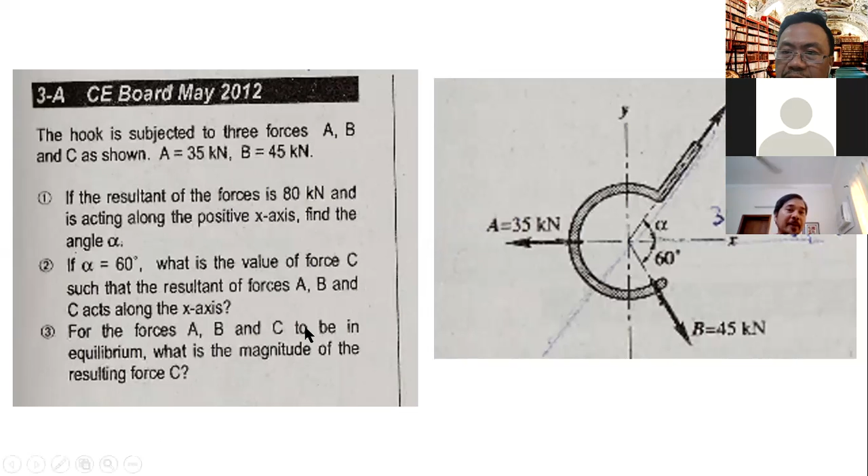Okay, so we have here the hook. This hook is subjected to 3 forces. You have A, this A, then you have C, and then you have B.

Okay, so which has corresponding forces. If the resultant of the forces is 80 kilonewton and is acting along the positive x-axis, find the angle. So there is a big difference that you have to check here. This is saying there's a resultant force of 80 kilonewton. This is number 1 and number 3, okay?

For number 3, the forces A, B, C have to be in equilibrium. It should be in equilibrium, so you are going to compute the force value of C. So it doesn't have a given resultant.

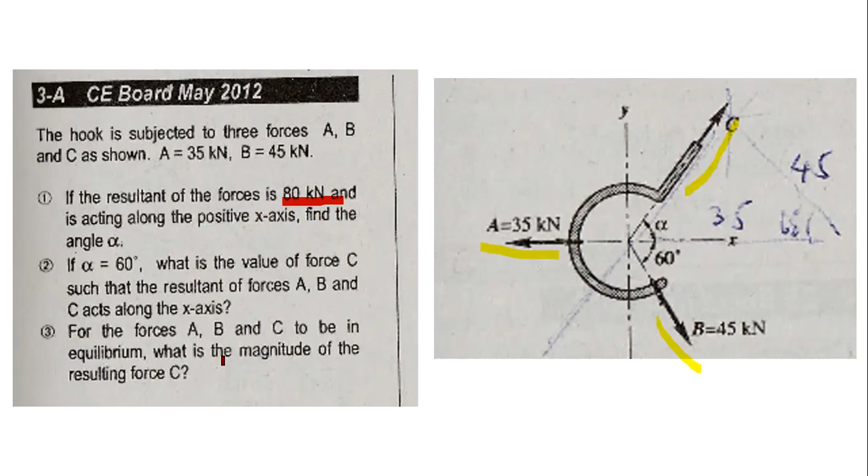Now first question, there is a resultant force of 80 kilonewton going to the right, positive x-axis. So there's 80 going to the right which we add for the first question. For the third question, only these 3 forces are in equilibrium, and you have to compute for force C. So for the first question, there is a horizontal resultant force of 80 kilonewton.

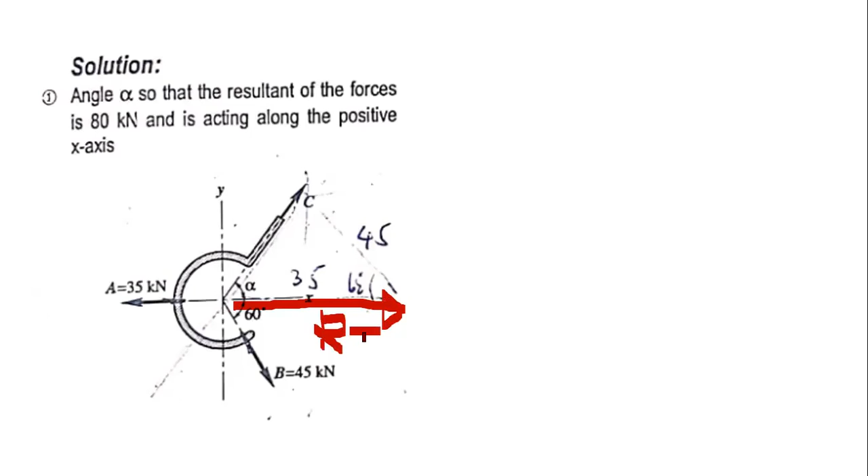Okay, that's what it's saying. So you just add these. And then we sum up forces horizontal.

So you have here C, this alpha, the cosine of alpha here becomes the C x-component. Cosine of alpha times C gives the x component. And then you have this 45 kilonewton, the x component is the cosine of 60. And then you have here in a direction going to the left, which is negative.

Equal to 80 kilonewton. This is the resultant force of 80 kilonewton. It happens here that the resultant force is just one, going to the right. That means the horizontal component is going to the right, the resultant force is going to the right. In other words, the horizontal component is also 80 kilonewton and the vertical component is 0.

That means C and B will just equate to 0 when you sum up the vertical direction. So sum up forces vertical direction, this is what we'll see too. We only have C and B.

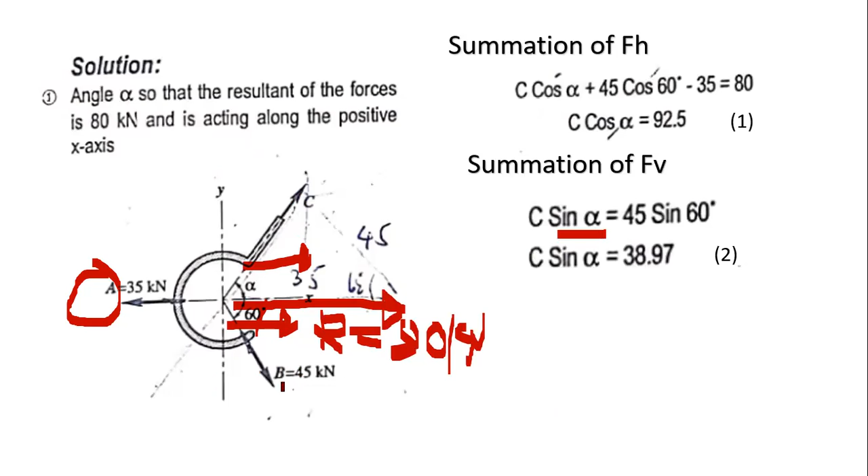For C, that component is sine of alpha. Whereas for B, it's the sine of 60. So we can have this one as equation 1 and this one as equation 2. And looking at the equations, if we divide equation 1 by equation 2, we can get tangent.

Okay, because actually it's cotangent - equation 2 divided by equation 1. Because C sine alpha divided by equation 1, which is C cosine alpha - the C's cancel out, so the remaining sine over cosine becomes tangent alpha.

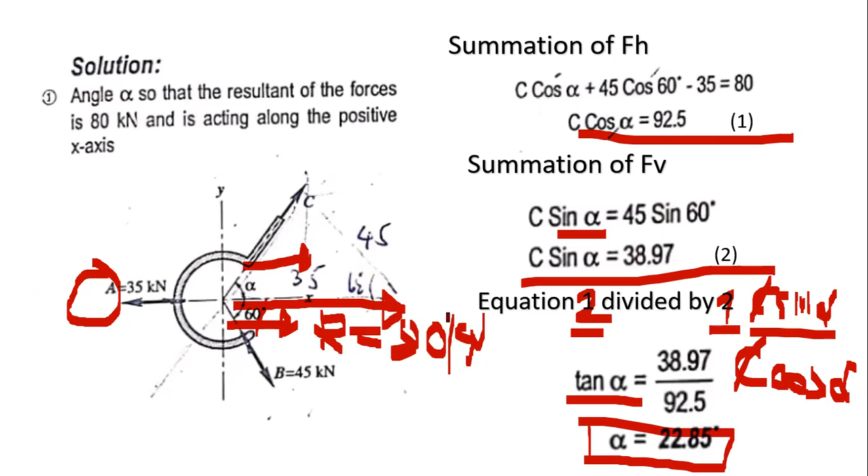So you have equation 2 is 38.97 and equation 1 is 92.5. In other words, we can compute alpha. So we can compute angle alpha given there is a horizontal resultant force of 80 kilonewton. Is this clear?

Okay, so let's move on. Now for value C, if alpha is 60 degrees given, what's the value of force C? So again, we just have to substitute.

Sum of forces vertical - that's all this is. Sum of forces vertical equals 0. Or force going up is equal to force going down. C, the sine of 60, which is this side, let's call it CY, is equal to 45 sine of 60.

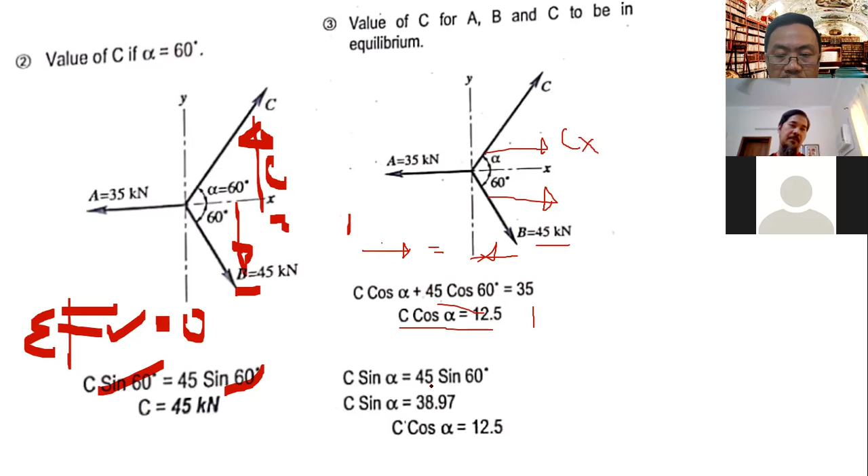Let's call it equation 1. And then for equation 2, sum of forces vertical: C sine of alpha, and then you have 45 sine of 60 - this is the vertical component. So we can have this equation 2.

Okay, so going further, we can use a similar approach to the previous question. We divide. What's this? Wait, this isn't cosine - it's sine. I made a mistake. Okay, this one is sine.

Check natin yung calculation niya. May kuwan lang dito. Check nyo na lang tong 12.5, kasi sine over cosine. If we divide equation 2 by equation 1. Nasagutan nyo naman to, di ba?

Mali pala itong tawag dito sa reviewer. Supposedly it's 38... what's this, baka ito, or ito. It's 38.97, the value of sine. Dapat ito, 38.97, eksakto pala ito. Ito equation, medyo lumito. This one is equation 2.

Equation 2, divide equation 1. Ito pala yung equation 2: C sine alpha over C cosine alpha. Pinagtabi na siya, equation 2 at ito yung equation 1, coming from here. So we can have 38.97 divided by 12.5, then we have tangent alpha. Similar to equation second question, I should say. So we can have C is equal to 40.9.

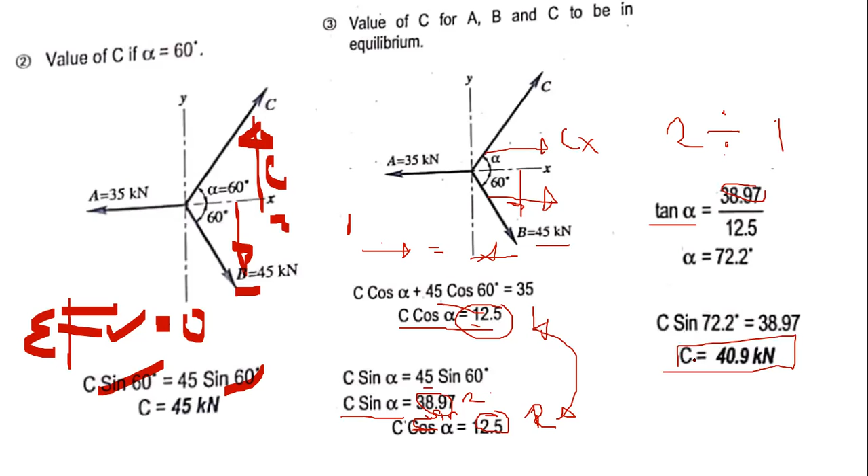Karamihan mo sa inyo nakakuha nito. Okay, so let's just proceed. Any questions? Punta tayo sa vector notations.

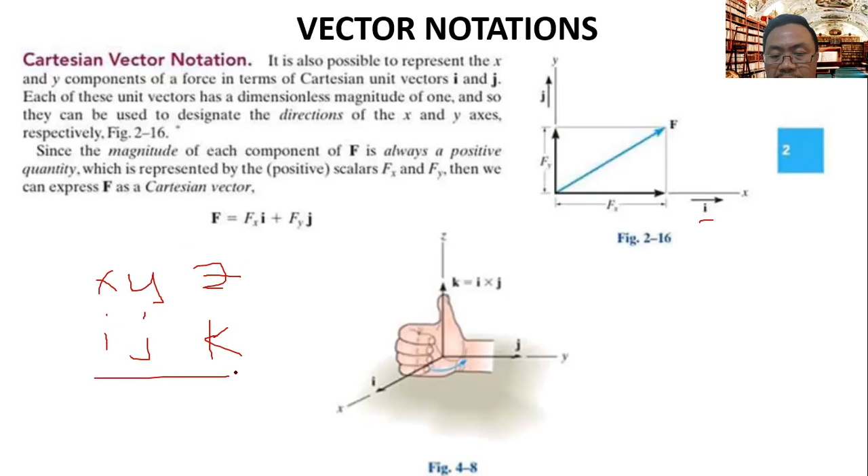So for example, this one, in vector, it has to be represented with I and J. So the component, this F1x, I, where's the F1? This is F1. So this one becomes F1xi, just to represent it into vector force representation. And if we have J, we just add IJ for us to know if it is along I or along J, along x or along y, respectively. So here, obviously, F1 going here is positive, and this one is positive din. So that's why we can see here in F1.

Similarly, for F2, for x or for I, it's negative, Y is positive. F3, positive for I here, and then negative for J. Then what is the resultant? So it's just like you combine all of them, and then afterwards you combine what is I and what is J. So here, obviously, this is the I components, and these are the J component. J component meaning it's vertical component, it's y component. I component meaning it's x component. But in vector, seeing I and J will help us understand that this one is representing x component or horizontal component, and this one is representing vertical component or J component.

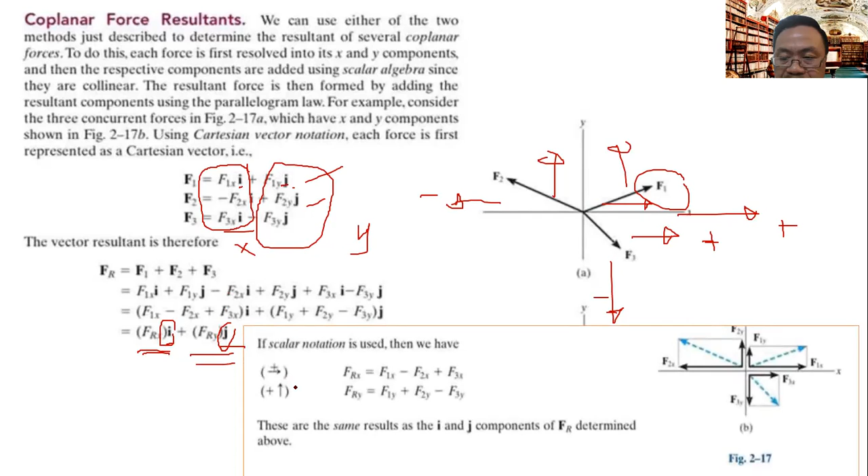As further shown here, for example, in scalar, just like what we did in the previous, even in the last session that we had. So we have two forces here. First, F1. F1 is here, could be here as well. So these are the components, vertical and horizontal. Here, cosine, this one is sine. And then we can write it here for F1, this is the calculation, obviously.

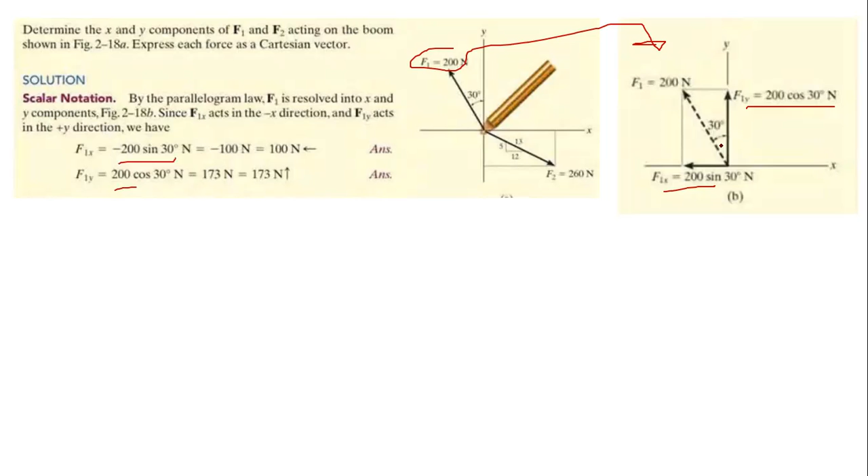And then for F2, you have this one here. This is the same that I have shown you solution method, but I'm not going to do it step by step. F2x, just this horizontal component, this is just 12 over 13 hypotenuse. This is using scalar.

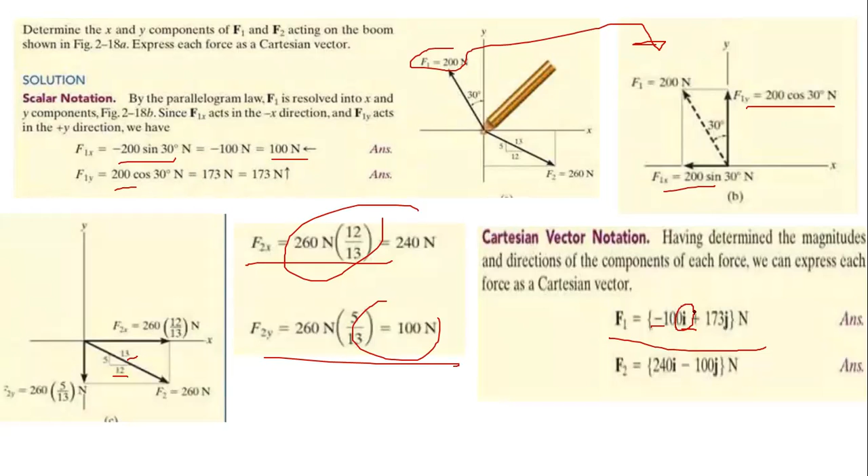But in vector, it could be represented by here, like this. For example, the vector components in vector for F1, you have here for F1, 100 negative. You show here negative and I, meaning we are observing here the letter I, meaning we could understand that this is horizontal component in a direction negative going to the left. And we have here 173, which is this one, going up, and that's why it's being represented by J, for us to understand that these are the directions. But to show I and J, meaning this is in a vector notation. Similarly for F2, you have also I and you have J. The calculation, of course, would be the same. You use cosine or sine accordingly.

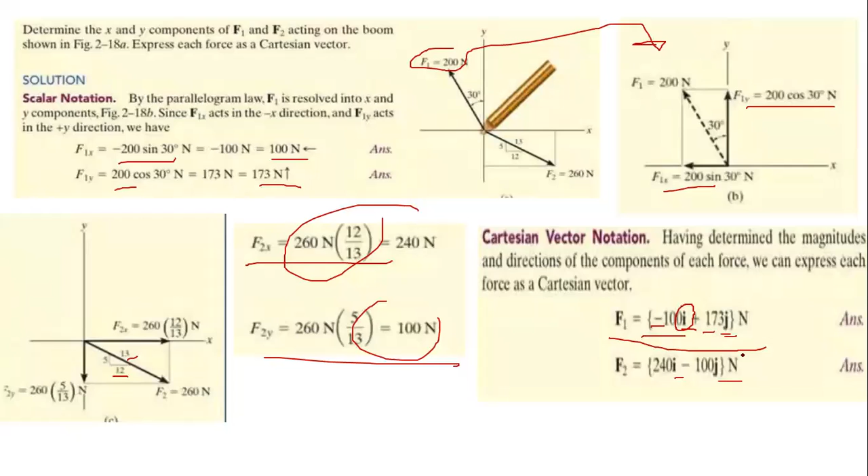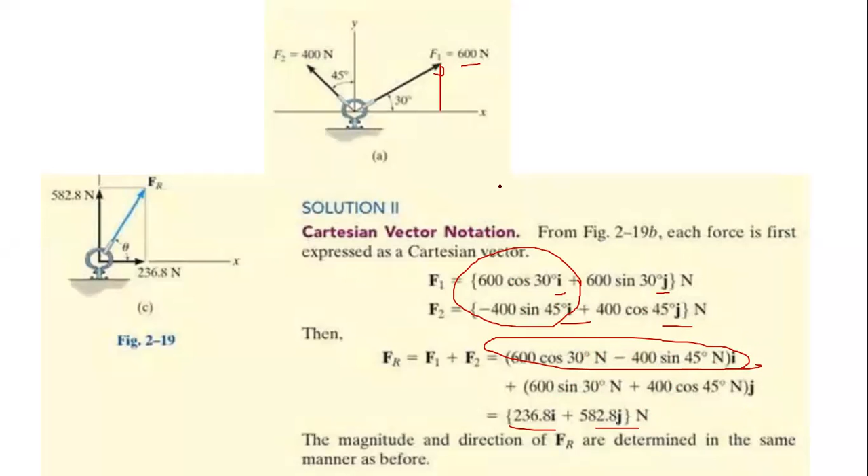Okay. 600 times cosine 30 minus 400 times sine 45. So we can have this one. And then you also have for j, we can have also this one. This is just to show in a vector analysis, which is just the same as previously. Okay. 236.8 and 582.8.

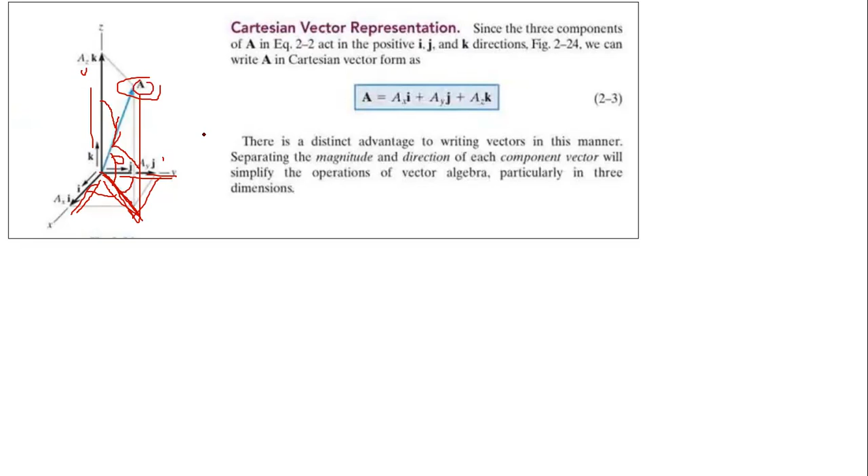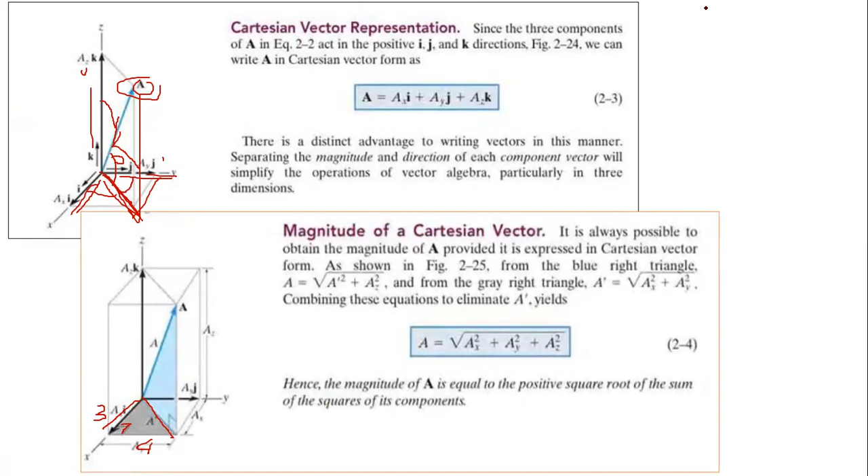Okay, that's 3D. Now, as you can see, its dimension or its magnitude, let us say this one is 3. Okay, this is 3, this one is 4. So what is this side? This is right angle. Anyone could speak, please. What is this side? If this is 3, this is 4, what is this one? Anyone? This is a right triangle, okay? This is 3, this is 4. What is this? Anyone can answer?

Huh? That's 5, right? It's a special triangle. It's 3, 4, 5. Thumbs up naman kung agree kayo. Okay, it's 3, 4, 5. Okay, so if this is 5, I can also have a triangle here. Okay, good. This one is 5. And then this height, pwede na natin itong Az. Okay? Meaning this A could be this A. A squared is equal to 5 squared and Az squared. That is why this total A is just this one.

Okay? In other words, to compute the dimension of A, for example, this is 3, this is 4, and the height is, let us say, 5. In other words, the total dimension of A going here, A is just equal to 3 squared plus 4 along X squared plus 5 yung vertical, yung Z. Okay? Yun ang value ng A in a 3D. Okay? Malinaw ba?

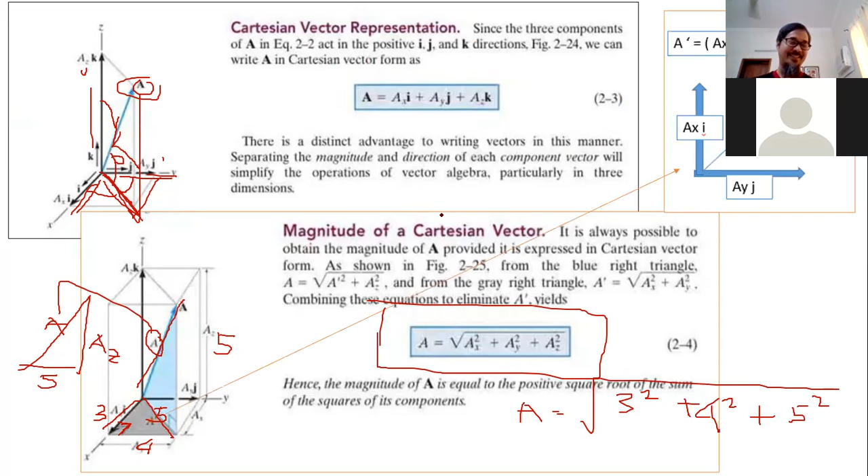Okay. Malinaw ang internet. Okay, let's move. Parang nagugutom na kayo. Tapusin lang natin to.

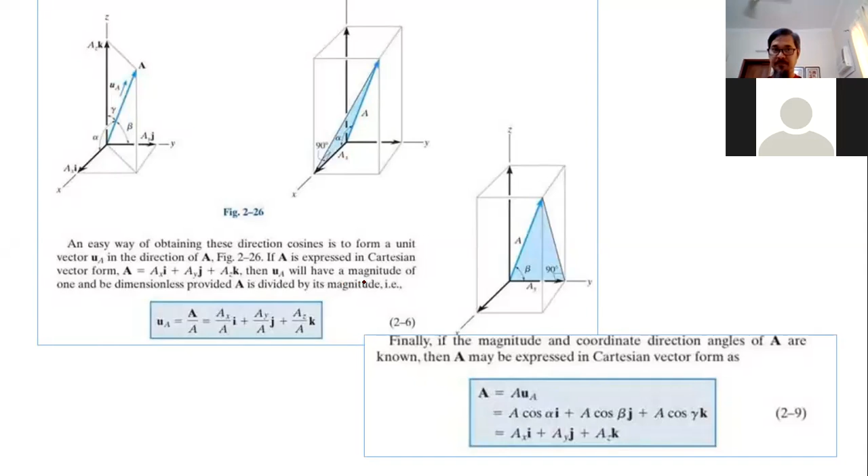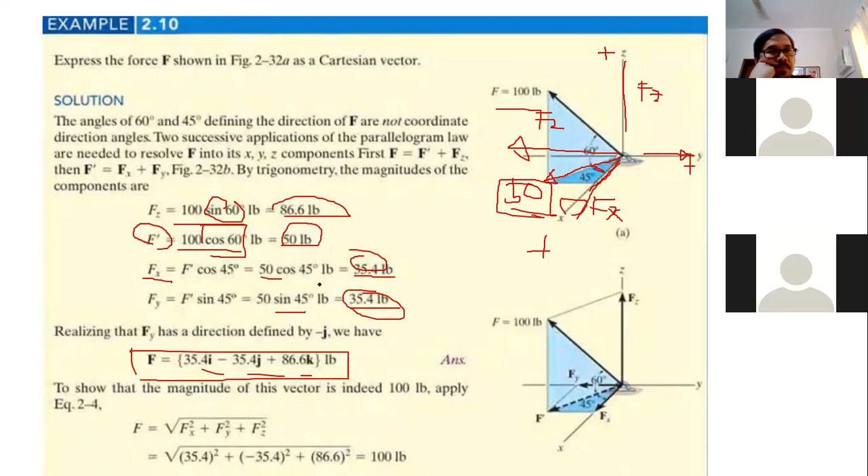Kasi ang orientation dito towards you is positive. Positive here. Dito positive, Z. Yung J naman, negative kasi papunta dito. Dito ang positive, going here, Y. Tandaan nyo dito ang orientation natin, X is towards you. Y is going here. And then Z is going up. Ito yung mga orientation ng positive. Kasi may mga questions sa board exam na related dito na magagamit ng vector.

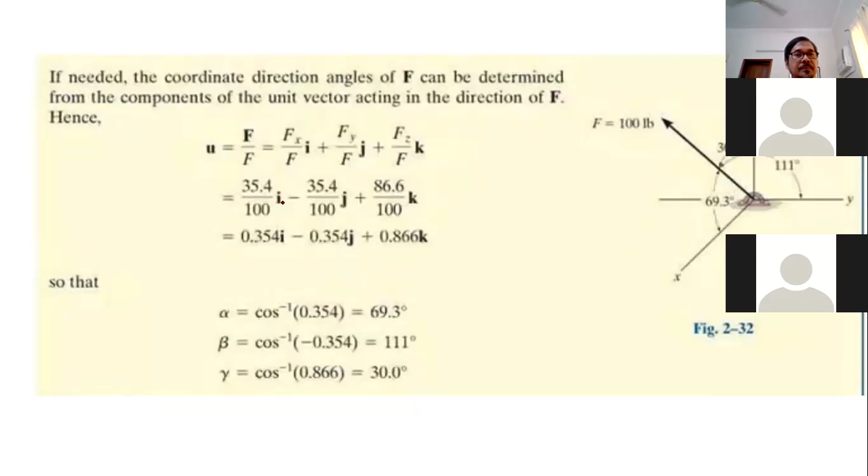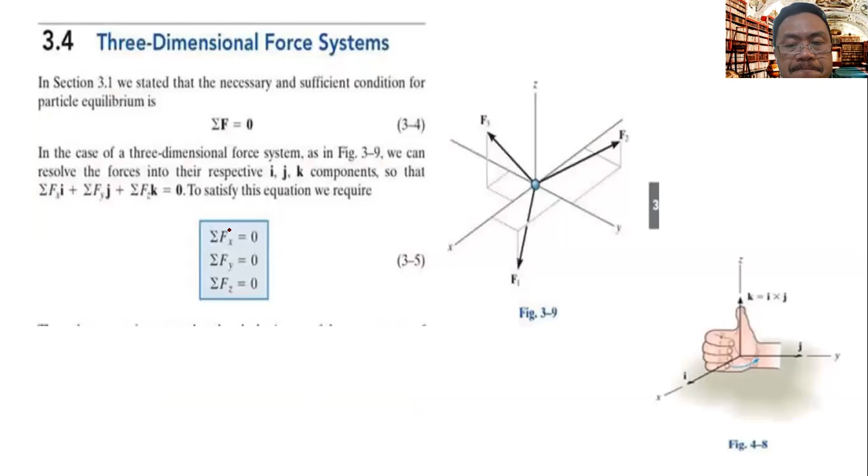Now, kung meron ka nitong force na 3D, sabi natin gawa tayo ng box. Box siya. Andito yung force sa gitna going towards this one. Let us say this one is F. How are you going to compute its component? First, you have to identify what would be the total length of this F. Total dimension. Kung halimbawa it is 3, this is 4, this is 5.